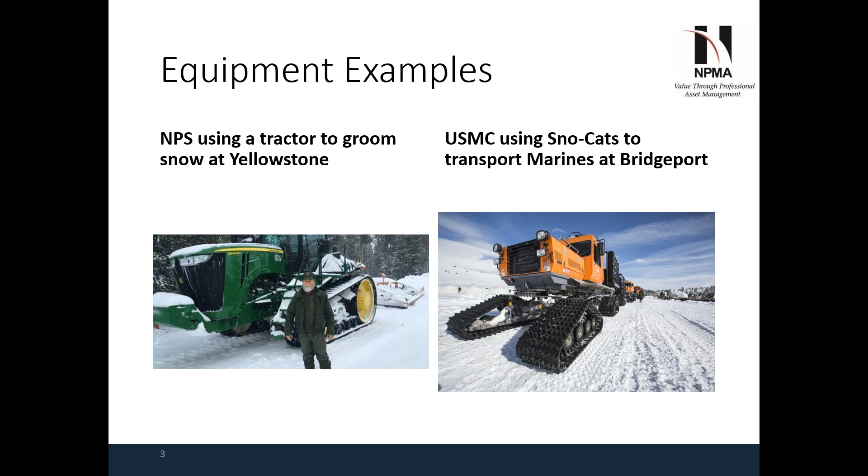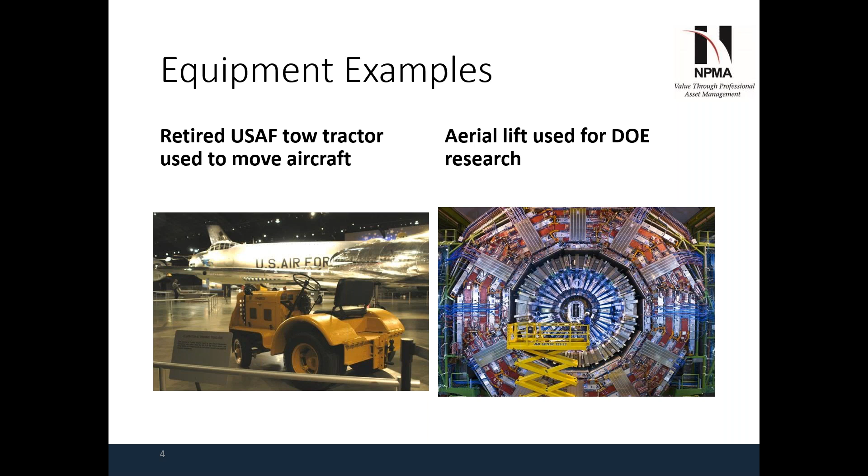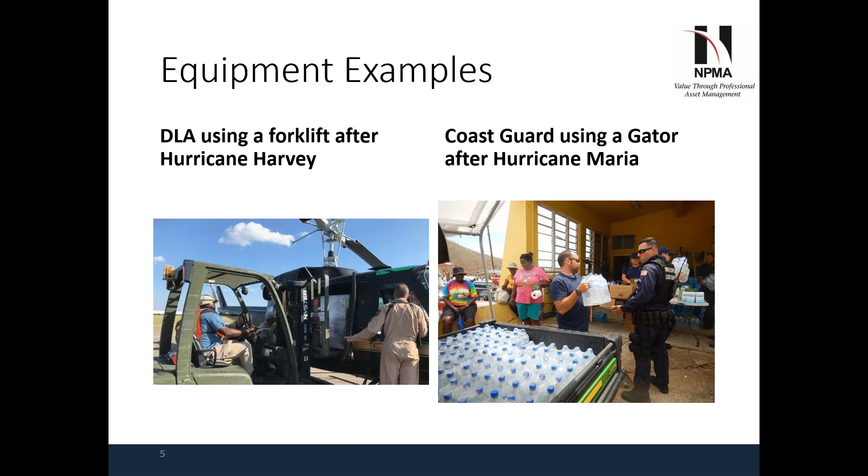Other examples of off-road or construction type equipment that is not FAST reportable: on the left-hand side, we see an example of an Air Force tow tractor that was previously used to move aircraft around an airstrip. On the right-hand side, we have an aerial lift that's used for Department of Energy research. We have forklifts being used by the Defense Logistics Agency, and kind of on the bottom of the screen, we're looking at the bed of a John Deere Gator, which is a little off-road type vehicle used for moving small amounts of material around. In this case, they're using it to transport water for hurricane relief.

So there's a lot of types of assets out there, and as I mentioned, there's a system for on-road assets called FAST, the Federal Automotive Statistical Tool. There's not a corresponding system for off-road assets, or what we're calling motorized assets. And the result of that is that the federal government doesn't necessarily have a comprehensive view of the size and cost of the off-road asset fleet.

And for that reason, the Government Accountability Office became involved and evaluated that issue and published a study. Quoting from the study, federal agencies use heavy equipment such as cranes and forklifts to carry out their missions, but there is no government-wide data on federal agencies' acquisition or management of this equipment. The study goes on to say, GAO was asked by Congress to review federal agencies' management of heavy equipment.

This report, among other objectives, examines the number, type, and costs of heavy equipment items that are owned by 20 federal agencies, and the heavy equipment that selected agencies recently acquired, as well as how they decided whether to purchase or lease this equipment. So they were going at it kind of from a slant of how do agencies make decisions about buying or leasing these types of assets.

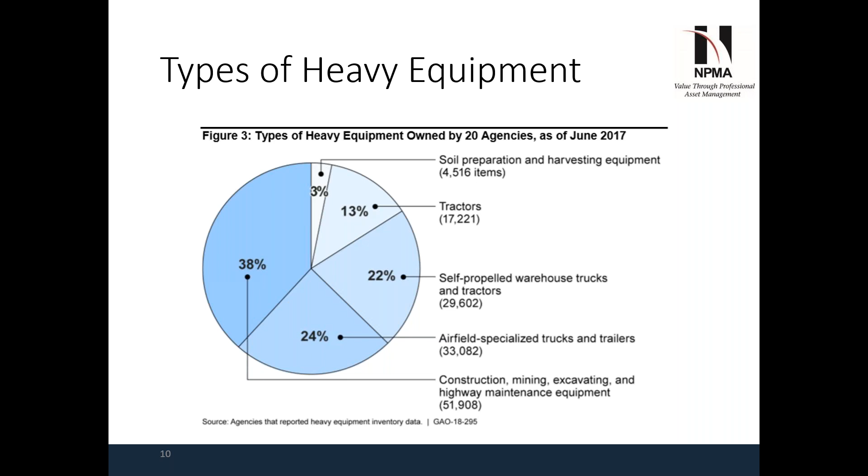So it would follow that they have to have the types of equipment needed to actually run a farming operation. So there are just some unique examples that folks might not think about when they just think of what type of off-road assets might the federal government have in its inventory.

So there's obviously new interest in this area from the GAO, and obviously there's a large number of assets out there, which would indicate that agencies should start thinking about what their management practices are around the use of these different types of motorized equipment. So the next question would be, where can I go for guidance on motorized equipment?

And this is kind of the genesis of the ASTM standard that was recently produced. So ASTM International developed a voluntary consensus standard that addresses considerations for effectively managing fleets of motorized mobile equipment assets. The standard guide for motorized equipment describes the various aspects of a motorized equipment management program.

Now, I'm not going to go into a big backstory on ASTM International or voluntary consensus standards, but essentially I'll sum it up as saying that this document can be used as a guidance document to help your organization. Some applications of it might be that if you're contracting out for a contractor to actually provide some sort of equipment management, you might want to reference a voluntary consensus standard.

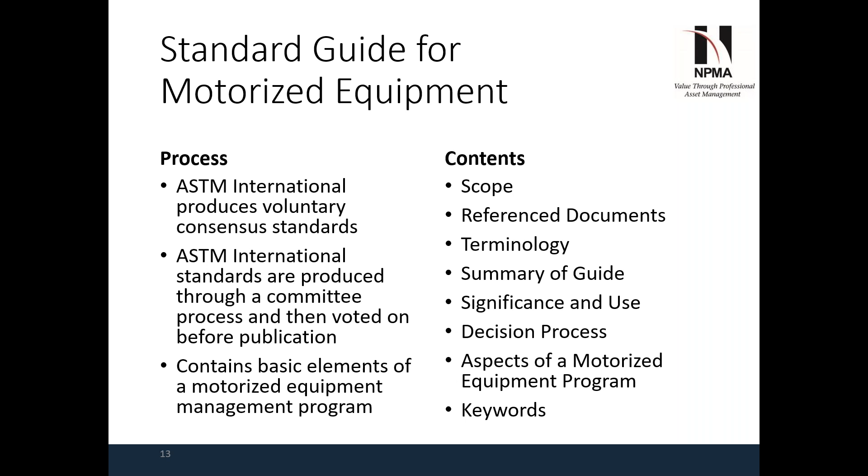So the topic areas contained within the standard itself are the scope, the documents that are referenced by the standard, terminology, a summary, some information on the significance of the standard and its use, decision processes that agencies should utilize when thinking about different aspects of their motorized equipment management programs, those aspects themselves of a motorized equipment program, and also keywords that are referenced in the fleet management industry and are discussed in the standard.

Sections 1 through 3 are really brief. Actually, I should say the entire standard itself is brief. It's a 4-page document, so it's not some huge volume of references. Like I said, it's a framework. It discusses all the different subject matter areas that somebody should be looking at. So it's brief in nature.

So the first section covers the scope. Like I said, those are the considerations for effectively managing motorized mobile equipment assets. The second section covers all the documents that are referenced by this standard. It actually points back to 5 predecessor ASTM standards and also references the GAO report that I just mentioned.

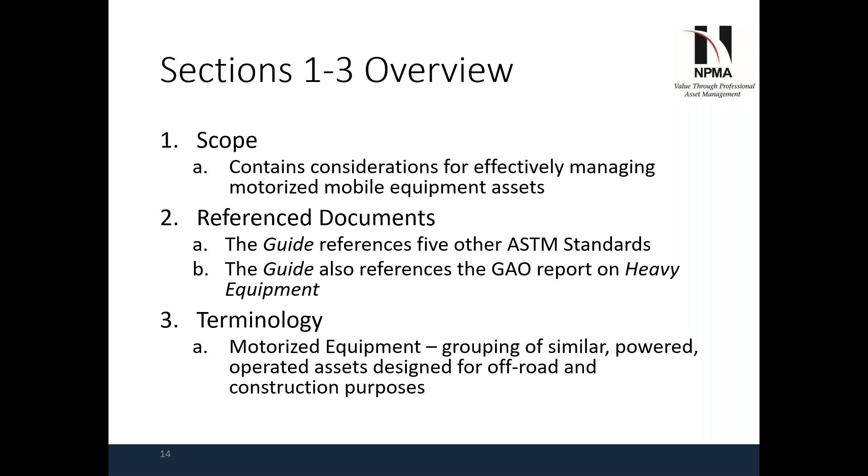And introduces terminology. Motorized equipment is a grouping of similar powered operated assets designed for off-road and construction purposes. So we're trying to build somewhat of a common terminology or common set of definitions around what motorized equipment is, because it can vary by who you ask, since there are so many different types of motorized equipment out there. Some folks might refer to it by different terminology.

So we're trying to maybe standardize a little bit on how we refer to these things. The next section is the summary of the guide. Organizations are able to realize significant cost savings and increases in efficiency when motorized equipment assets are managed strategically and holistically. Organizations are able to realize significant cost savings and increases in efficiency when management of a motor vehicle fleet and management of motorized equipment assets fall under the same management group.

So just looking at these, what is being stated in this standard is that there are very similar processes that are used between managing on-road assets and motorized assets that are off-road assets. They all have capital costs up front, how much it takes to buy these vehicles. They can all potentially be leased. All of them, you should monitor how much they're being utilized to ensure that you don't have any underutilized assets in your fleet. So there are a lot of similar management processes around the effective management of these.

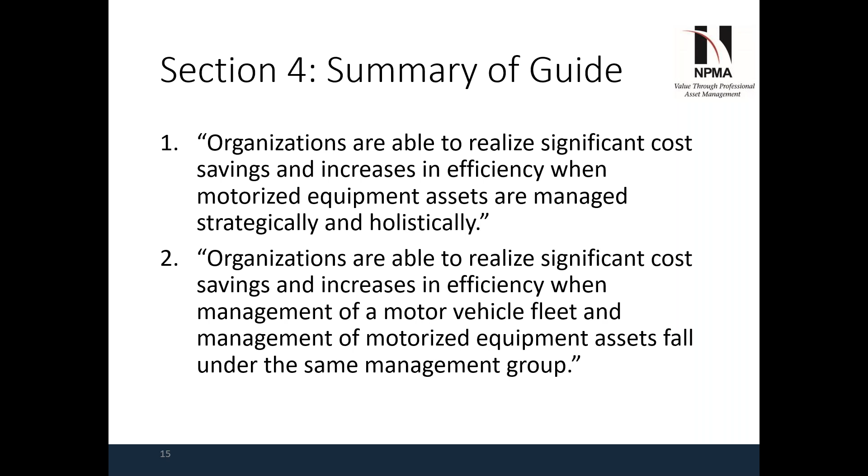So it would almost make sense that if you have a group within your organization that's managing your on-road fleet, that they have some relationship or they are the same group that's managing off-road assets. In some organizations it may not be feasible, but there can be economies of scale that are developed by having one organization operate both fleets.

Effective management of motorized equipment assets is multifaceted. An organization can choose the effort and resources dedicated to its management program based on factors such as investment in the assets, the complexity of the assets themselves, and the risks correlated with the availability of the assets. The goal of effective motorized equipment asset management is to maximize the value to the organization while ensuring availability to fulfill the mission and minimize exposure to risks.

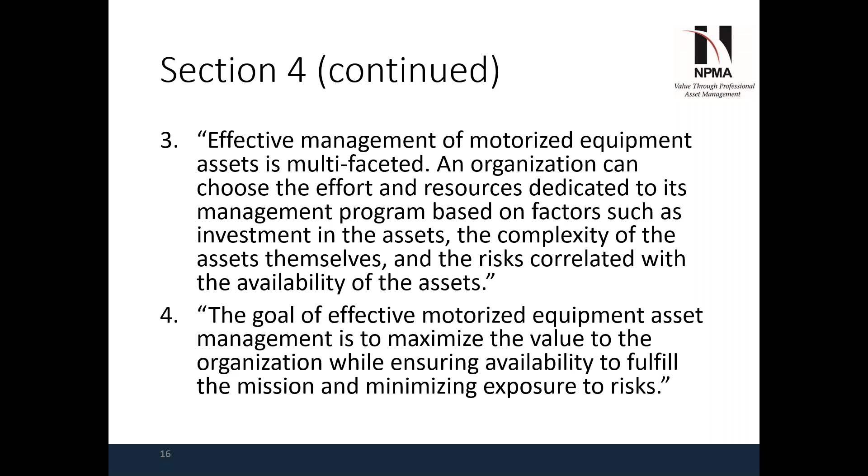And the last paragraph of that section: the management of motorized equipment may differ from motorized equipment operation. Effective management of motorized equipment incorporates appropriate operational policies and communicates what must be done, and procedures which communicate how to do what must be done.

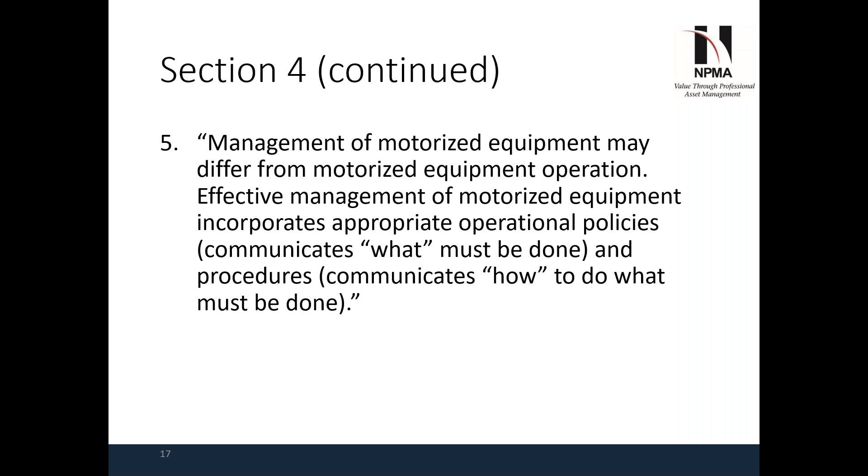Now, the next section covers the significance and the use of the standard.

The guide promotes improved accountability and enhanced operational performance in the context of motorized equipment. Measurement and management of the motorized equipment program can result in cost savings, increased asset visibility and utilization, and extended asset life.

Sorry, my slide jumped here.

Petroleum and greenhouse gas reductions, and increased mission effectiveness.

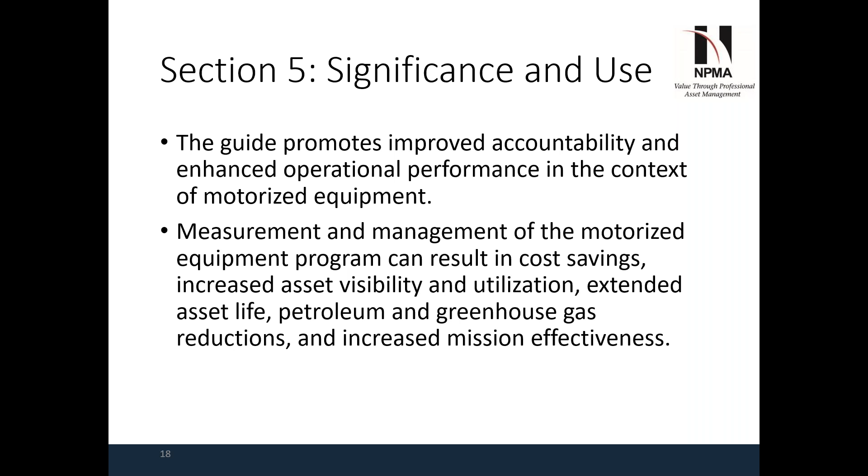Section 6 covers asset decision processes. They break down the different phases of the asset's life cycle, which include the acquisition phase, the disposal phase, and use, which encompasses maintenance and operation. So in the acquisition phase, it's important to determine the types of motorized equipment assets that your organization needs, and the acquisition or financing methods.

For example, you might identify a need for an asset, and your organization determines that it's most cost effective to pay cash for that asset and own it for its entire life cycle. Conversely, you may have a need for that asset for a short-term period, and it would be better to rent or lease it and then turn it back in when a particular job is done. You need procurement procedures, funds management strategies, and a financing method.

Under the... presentation started to develop a mind of its own here.

Under the use phase, you have managing the operation, utilization, deployment, dispatch, maintenance, and repairs. Under the disposal phase, you have maximizing residual value, which is trying to get as much money as possible for the asset when it is sold at the end of its life, and minimizing the costs of preparing the asset for disposal. So can you get rid of the assets efficiently, or is it a laborious process to do so?

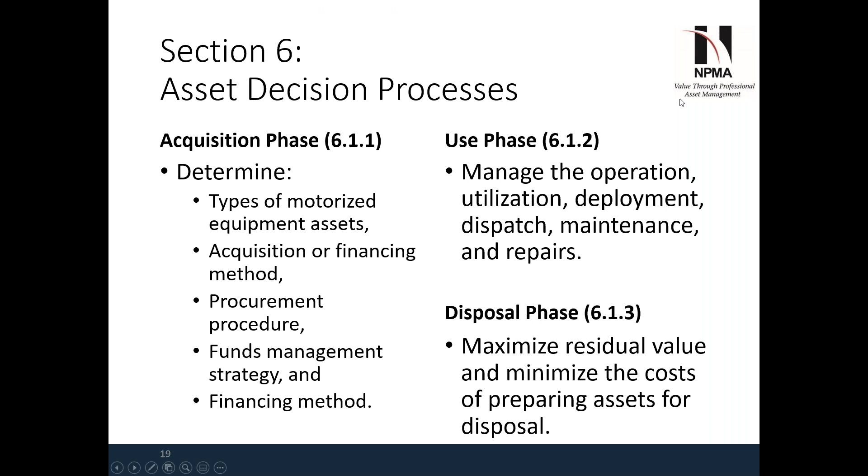Section 6 also covers personnel decision processes. Personnel should have the knowledge and expertise to ensure their success at each of the aforementioned stages. One of the things we'll promote here is that the NPMA organization has a fleet certification and training program.

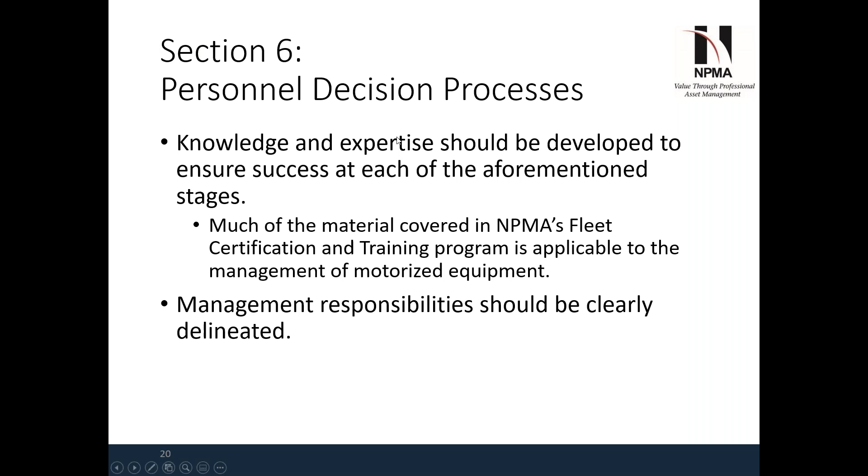A lot of the principles and practices discussed in that fleet certification and training program are also applicable to the management of off-road or motorized equipment. Like I said before, if you know the principles of managing life cycle costs for on-road assets, there's definitely a translation there to being able to understand those for motorized equipment. Management responsibilities should also be very clearly delineated.

Section 7.1, operational aspects for consideration. It describes 24 aspects of an effective motorized equipment management program. I'm not going to cover all of them, but essentially, it discusses motorized equipment utilization, right-sizing the motorized equipment fleet, motor pool operations, reporting systems, and training and certification.

In section 7.2, the training aspect, there's a bunch of different topic areas, including security, hazardous materials, accident management, laws, regulations, policies. Utilization is an important one, especially for specialized types of assets. Allocation or right sizing, inventory management, safety and risk management, maintenance and repair, and reporting requirements.

And if you see my slide deck jumping around, I think somehow PowerPoint has gone into an autopilot mode where it's advancing the slides by itself, so I apologize.

Additional training areas are fueling, alternative fuels and fueling, acquisition and disposal, customer relationship management, replacement planning, and total cost of ownership.

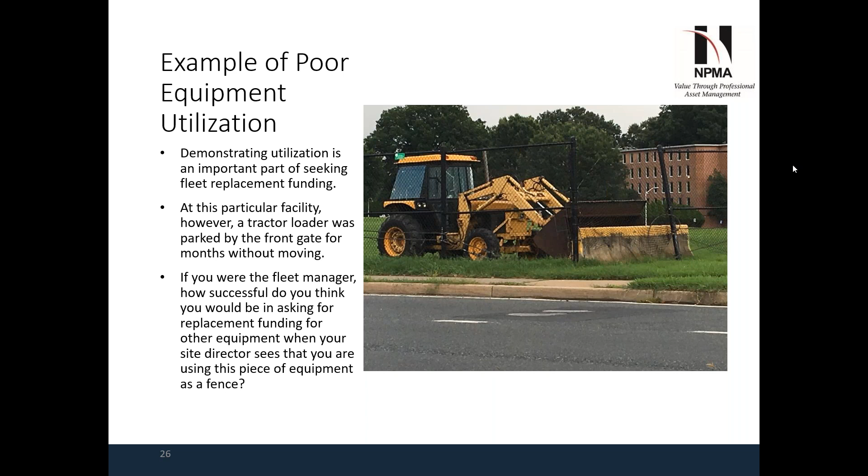Okay, before buying equipment, what you might consider is the overall demand. Demand can be constant for certain types of equipment like forklifts operating in a warehouse, or it can be extremely intermittent like paving equipment.

Consider required equipment response times. Some equipment may be needed for unplanned events like water main breaks or snow emergencies, and other equipment is not associated with any type of emergency response.

Also consider personnel qualifications before acquiring complex or potentially dangerous equipment. Some equipment can be dangerous in the hands of unqualified employees or when used only intermittently. Forklifts are a prime example of this. Employees should be qualified and certified to operate forklifts.

The problem being that in many scenarios, a forklift is usually left sitting in an area where other employees may have access to it, and the key may be left in the ignition. So somebody who has never had any training might be inclined to jump on the forklift and attempt to drive it to offload something off of the truck. Being unfamiliar with the handling and weight characteristics of the forklift, they can cause significant injuries or property damage.

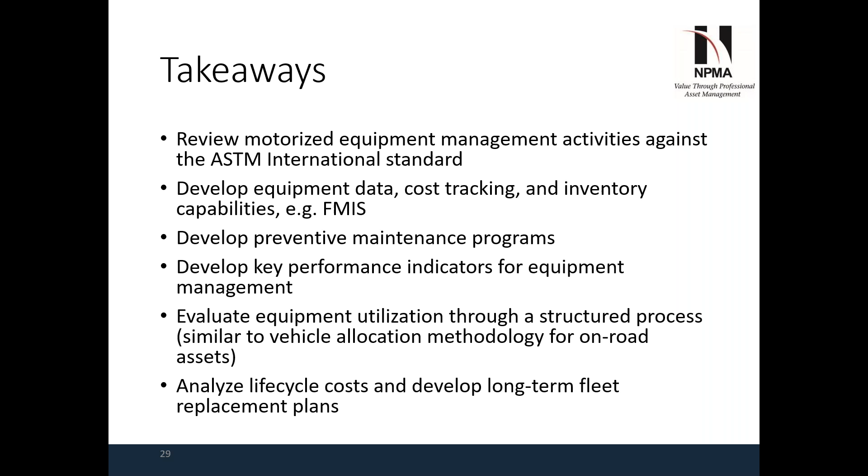And I will take any questions that anybody has.